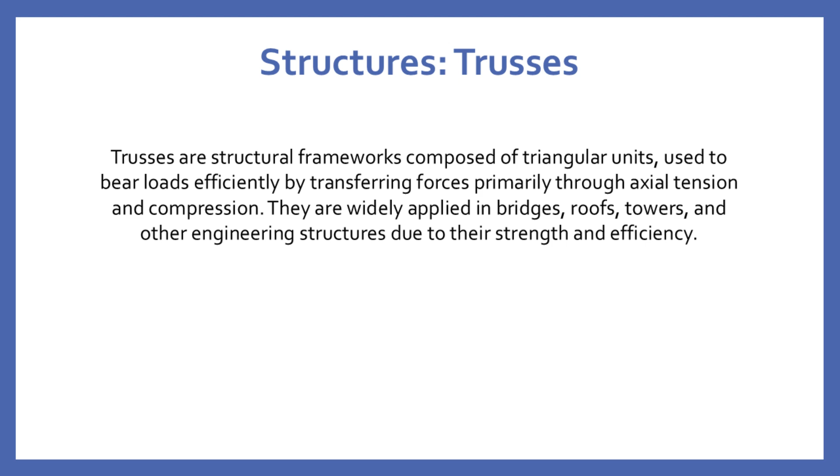Let's talk about trusses, the unsung heroes of structural engineering. A truss is essentially a lightweight yet incredibly strong framework composed of triangular units, like nature's most efficient load-bearing design. These structural marvels are primarily used in bridges, roofs, towers, and countless other engineering structures. What makes trusses special? They transfer forces brilliantly through axial tension and compression. By using triangles, the most stable geometric shape, engineers create structures that can bear enormous loads while remaining surprisingly lightweight. Imagine a bridge that can support heavy trucks or a roof that withstands extreme weather. That's the power of a well-designed truss.

Now let's zoom in on plane trusses, the two-dimensional cousins of our truss family. A plane truss is a flat, interconnected framework made of structural members forming triangles. The magic of these structures lies in their ability to distribute loads effectively and resist deformation. Why triangles, you might ask? Because a triangle is the only geometric shape that cannot be deformed without changing the length of its sides. This inherent rigidity makes triangular trusses incredibly stable under external forces.

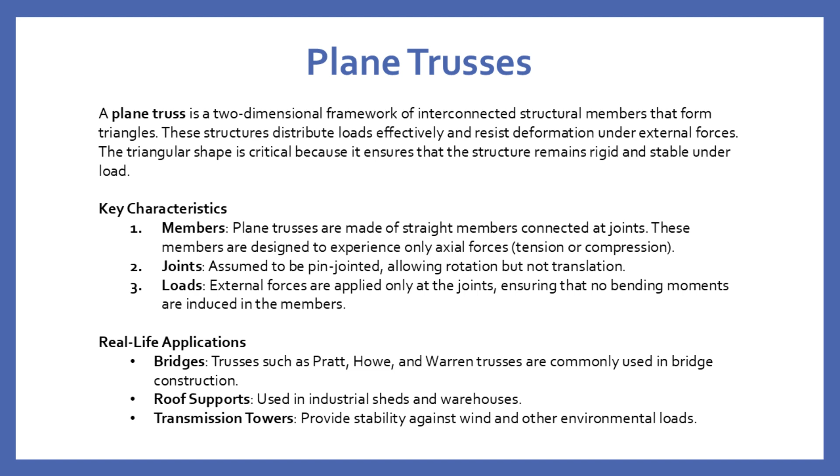In a plane truss, each member is designed to experience only axial forces, either pure tension or pure compression. It's like a perfectly choreographed dance of structural elements working together to maintain stability.

Let's explore the concept of a perfect truss, a mathematical marvel of structural engineering. A perfect truss is precisely balanced, with just the right number of members to ensure stability and rigidity without any redundancy. It's like a perfectly tuned orchestra where every member plays a crucial role. The key to determining a perfect truss lies in a mathematical condition: the number of members must equal 2 times the number of joints, minus 3. Let me break this down for you.

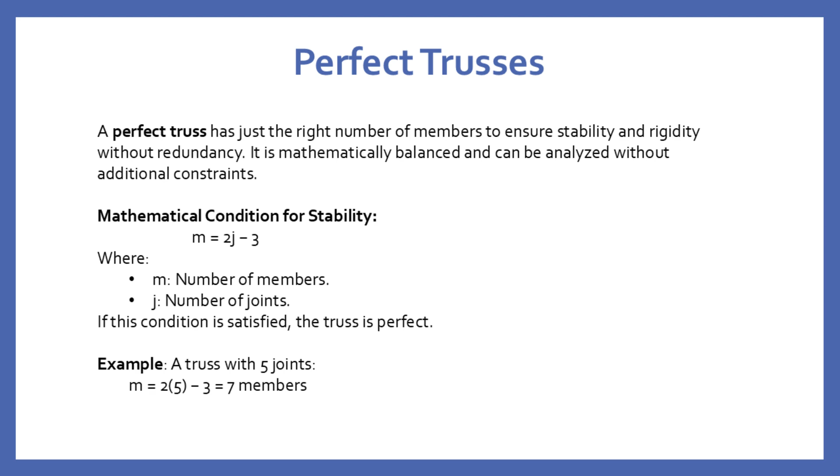Consider a truss with 5 joints. By applying our formula, we'd need exactly 7 members to create a perfect, stable structure. It's a delicate balance between having too few members, which would make the truss unstable, and too many, which would complicate the design unnecessarily.

Now let's discuss imperfect trusses, structures that deviate from the perfect balance. There are 2 types of imperfection we need to understand. First, we have deficient trusses, where the number of members is less than what's mathematically required. These trusses are like a house of cards, unstable and unable to resist external loads effectively. On the other hand, we have redundant trusses, which have more members than necessary. While it might seem like more members would make a structure stronger, in reality, these extra members can complicate the analysis without providing significant structural advantages.

Think of it like adding extra wheels to a bicycle. It doesn't necessarily make the ride smoother or more stable.

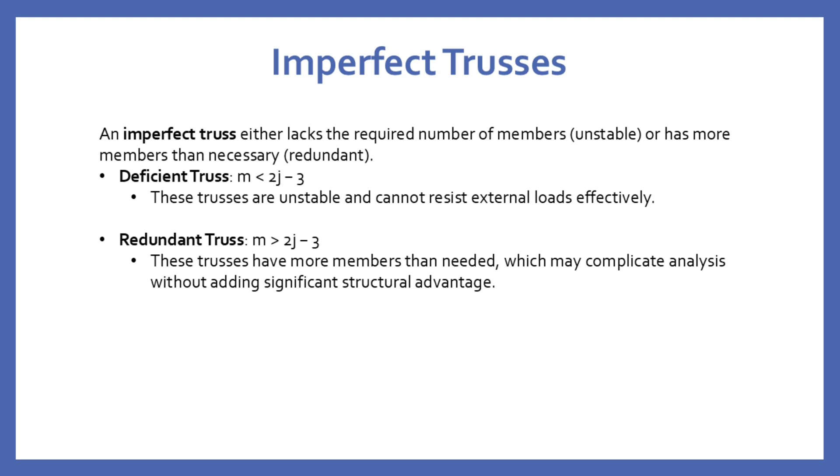When analyzing trusses, engineers rely on several critical assumptions to simplify complex structural behavior. First, all joints are considered pin-connected, allowing rotation but preventing translation, like a flexible joint that can pivot but not slide. Second, all external loads are applied directly at the joints, which helps avoid creating bending moments in the members. Third, members are subjected only to axial forces, pure tension or compression. And finally, the weight of the members themselves is typically negligible or assumed to be applied at the joints.

These assumptions transform a potentially complicated analysis into a more manageable statics problem. It's like creating a simplified model that captures the essence of the structural behavior without getting lost in unnecessary complexities.

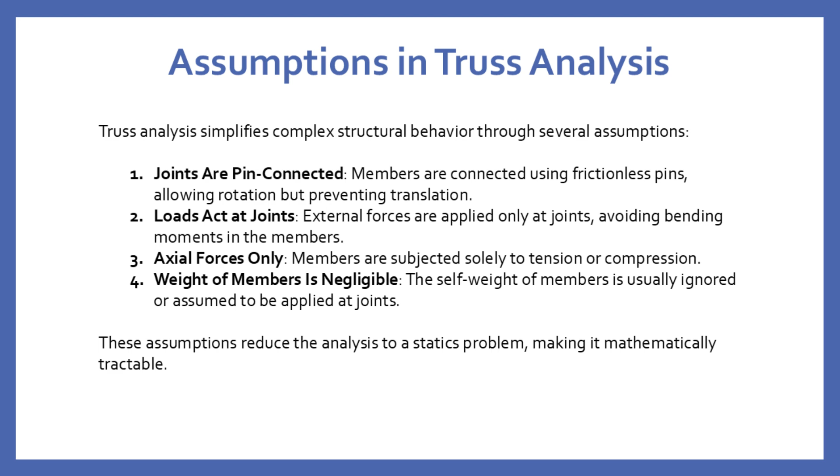Let's dive into the first method of truss analysis, the method of joints. This is a fundamental approach to truss analysis, focusing on the equilibrium of forces at each joint. By selecting joints with only two unknown forces and resolving them horizontally and vertically, we can systematically determine the axial forces in each member. This method is particularly effective for smaller trusses, providing a straightforward and systematic approach to understanding the load distribution within the structure.

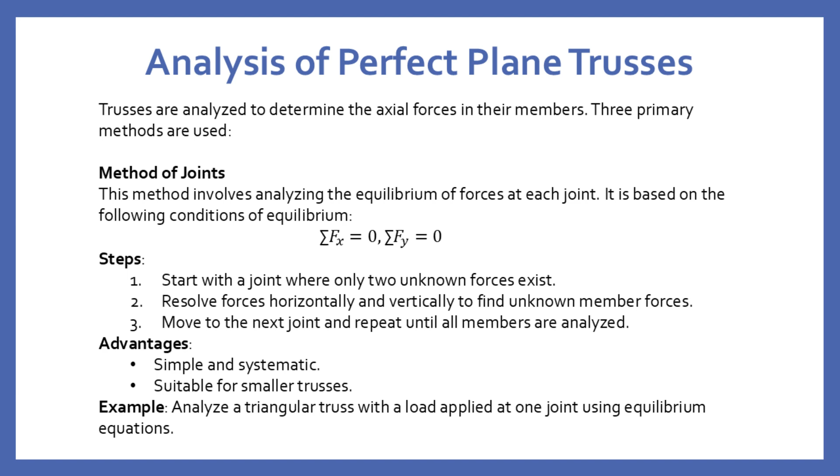The core principle of this method lies in ensuring equilibrium at each joint, where the sum of horizontal and vertical forces must equal zero. By progressing through the truss, joint by joint, we can unravel the intricate interplay of forces and gain insights into the overall structural behavior. This methodical approach transforms a complex system into a series of manageable equations, making it a valuable tool for structural engineers.

Welcome to the method of sections, a powerful analytical technique that takes a different approach to understanding truss behavior. Instead of examining each joint individually, this method involves strategically cutting the truss into sections to analyze specific parts of the structure. Imagine taking a slice through the truss to reveal its internal forces.

The key here is to apply equilibrium conditions to the entire cut section, balancing forces in all three directions: horizontal, vertical, and moment. This method becomes incredibly useful when you want to determine forces in specific members without analyzing the entire truss. It's particularly efficient when you need to focus on critical members in complex structures like bridges or large industrial frameworks.

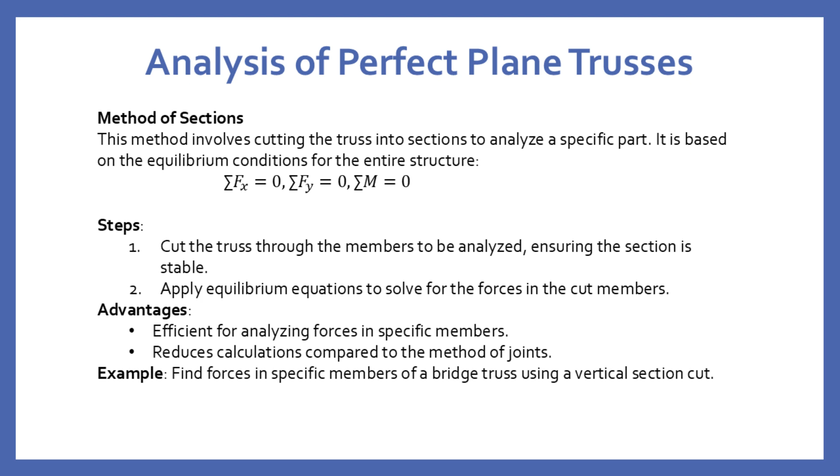Think of it as a surgical approach to structural analysis, precise, targeted, and incredibly informative.

Let's explore the graphical method, a more visual approach to truss analysis. Unlike purely mathematical methods, this technique allows engineers to literally draw out the forces at work.

The process begins by drawing the truss to scale, then graphically representing loads and reactions. By constructing a force polygon, we can determine the forces in each member visually.

It's like creating a picture of forces, where the geometry of the drawing reveals the structural behavior. While this method might be less precise compared to analytical approaches, it offers an invaluable tool for visualization and approximate solutions.

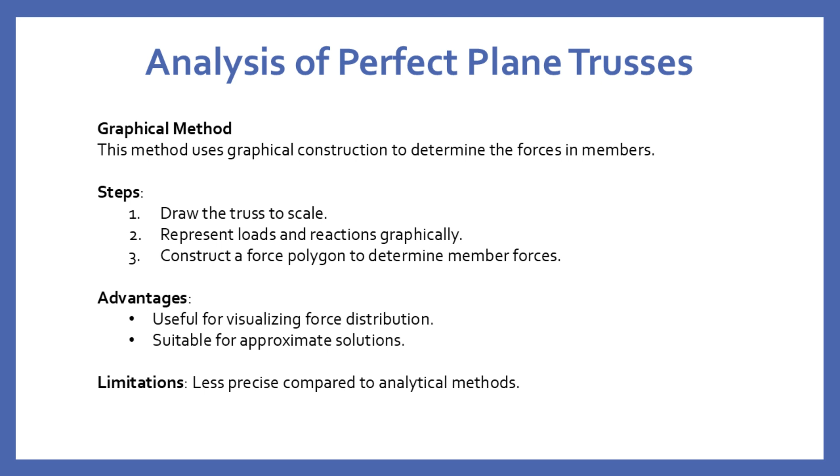Engineers often use this method for quick estimations or to gain intuitive understanding of force distributions. Imagine being able to see the forces flowing through a structure. That's the power of the graphical method.

Truss analysis isn't just a theoretical exercise, it's a critical tool in real-world engineering. In bridge design, engineers use these techniques to determine precise load-bearing capacities and identify which members are experiencing critical tension or compression.

Building structures rely on truss analysis to design robust roof frameworks that can support various loads efficiently.

Transmission towers, those towering structures that carry electricity across vast landscapes, depend on truss analysis to ensure stability against wind

and environmental challenges. Each application demonstrates how understanding truss behavior translates directly into safer, more efficient infrastructure.

From the bridges we drive on to the towers that power our cities, truss analysis is the invisible engineering that keeps our world standing strong.

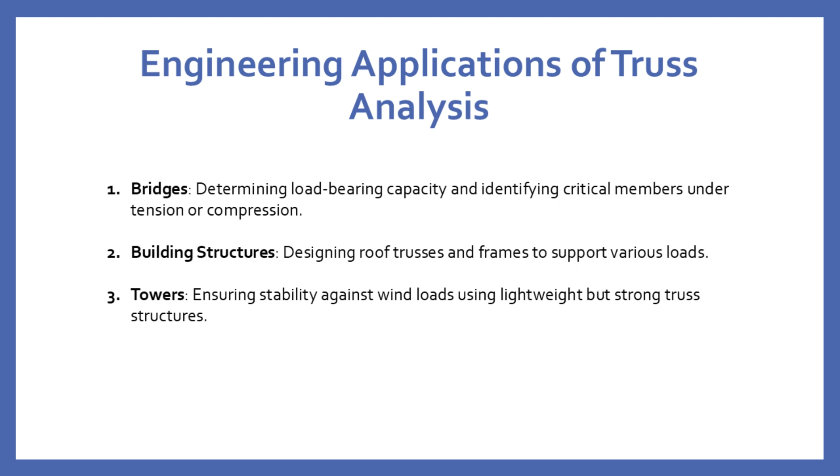Let's dive into the fascinating world of friction, a fundamental force that shapes how objects interact and move. Friction is a resistive force that opposes the relative motion or tendency of motion between two contacting surfaces.

It's not just a theoretical concept, but a critical phenomenon that affects everything from the shoes we walk in to the most complex machinery. At its core, friction arises from the microscopic irregularities on surfaces and the intermolecular forces at points of contact.

Imagine two surfaces trying to slide past each other. The tiny bumps and valleys create resistance. In engineering,

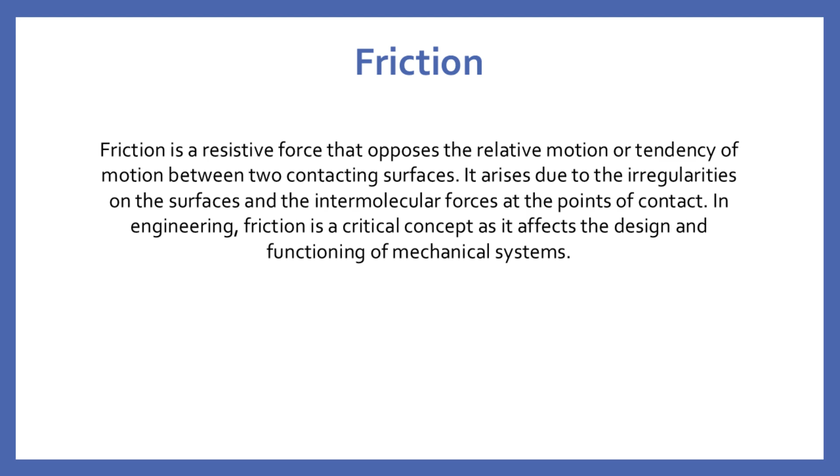Understanding friction is crucial because it determines how machines work, how components interact, and how we design systems to move efficiently or stay stationary when needed.

Let's talk about static friction, the unsung hero that keeps things from sliding around unexpectedly. Static friction is the force that resists the initiation of motion between two bodies when they're at rest.

Picture a book sitting on a slightly tilted table. Static friction is what prevents it from immediately sliding down.

What makes static friction unique is its dynamic nature. It increases as you apply more force, up to a maximum value.

Once the applied force exceeds this threshold, motion begins, and static friction transitions to kinetic friction. It's like a protective barrier that gradually gives way under increasing pressure.

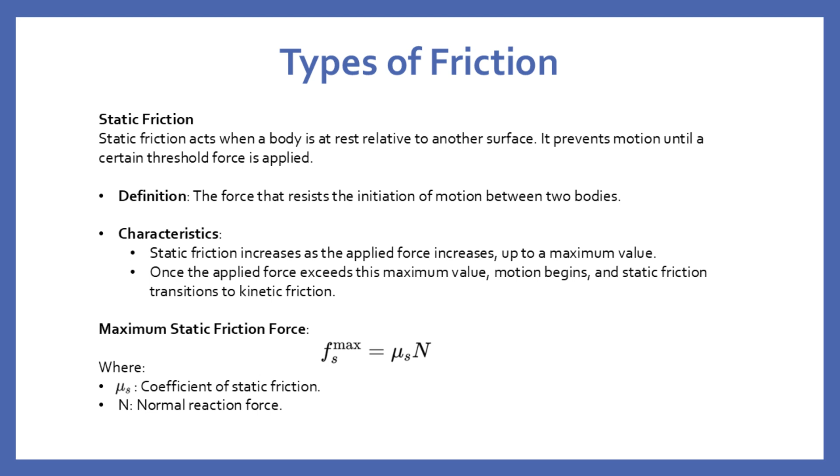This type of friction is crucial in countless applications, from preventing your coffee mug from slipping to ensuring the stability of structures and machines. Now we transition to kinetic friction, the force that comes into play when surfaces are actually

moving relative to each other. Unlike static friction, kinetic friction is a constant force that opposes the relative motion between two bodies. Imagine sliding a book across a table. The resistance you feel is kinetic friction.

Here's a fascinating characteristic. Kinetic friction remains constant for a given pair of surfaces, and interestingly, it doesn't depend on the velocity of motion. It's generally less intense than static friction, which is why it's often easier to keep an object moving once it's already in motion.

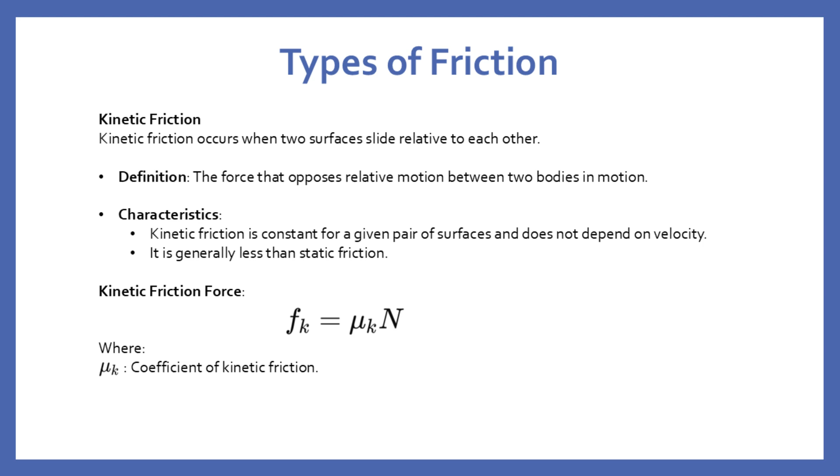This type of friction plays a crucial role in everything from mechanical design to understanding how objects move and interact in the real world. Let's unpack the fundamental laws that govern dry friction.

First, there's the law of proportionality to normal force. The frictional force is directly proportional to the normal reaction force. This means the harder two surfaces are pressed together, the greater the friction between them.

Second, and perhaps surprisingly, friction is independent of contact area. The microscopic contact points determine friction, not the overall surface size.

Third, friction depends entirely on the materials and their surface conditions. Different materials will create different levels of resistance.

Finally, and this is crucial, static friction is usually higher than kinetic friction. This explains why it's often harder to start an object moving than to keep it moving.

These laws might seem simple, but they're the foundation of understanding how objects interact in mechanical systems.

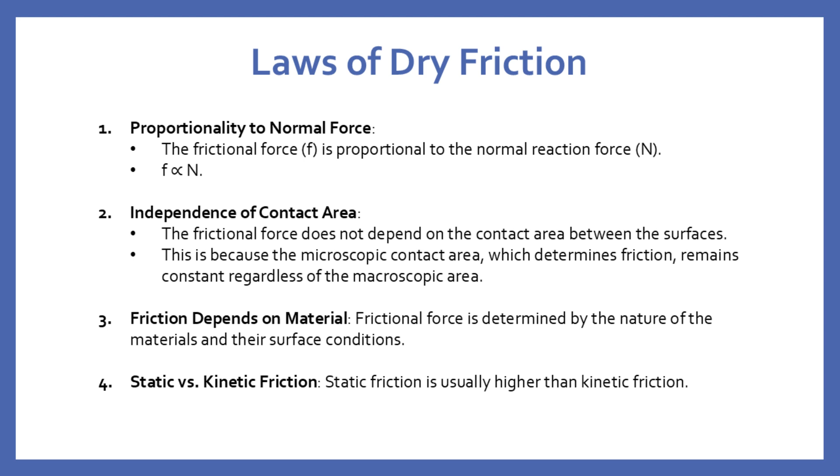Enter the coefficient of friction, a dimensionless quantity that quantifies the interaction between two surfaces. We have two types, static and kinetic coefficients.

The static coefficient applies when an object is at rest, while the kinetic coefficient comes into play when the object is in motion. Let's look at some real-world examples.

Rubber on concrete has a high friction coefficient of about 0.8 when stationary and 0.7 when moving.

In contrast, ice on ice has an incredibly low friction coefficient of around 0.1 when stationary and just 0.03 when moving. This explains why it's so challenging to walk on ice.

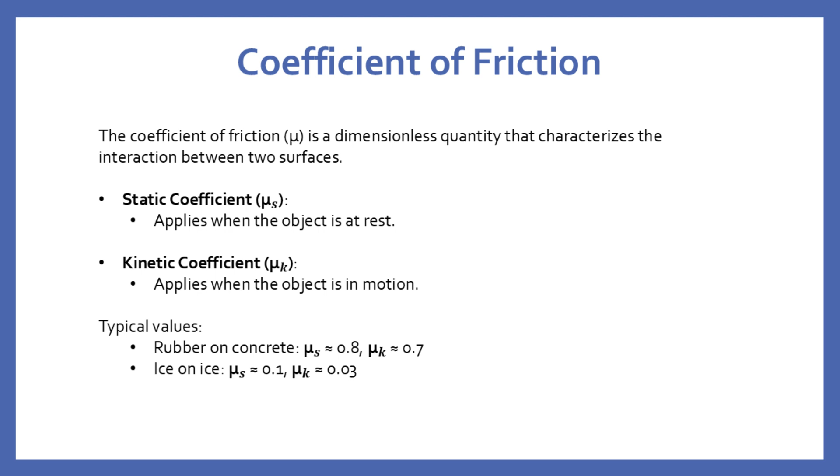The surfaces have minimal friction. Understanding these coefficients is crucial for engineers designing everything from footwear to industrial machinery.

The angle of friction is a fascinating geometric representation of how friction works. It's defined as the angle made by the resultant of the normal reaction and the limiting friction force with the normal force. The formula is beautifully simple: tangent of the angle equals the coefficient of friction. As the coefficient of friction increases, so does the angle of friction. Think of it like a visual indicator of how sticky two surfaces are to each other.

This concept is more than just mathematical. It helps engineers understand how surfaces interact and predict movement under different conditions. It's a key principle in designing systems where friction plays a critical role, from mechanical bearings to understanding how objects might slide on inclined surfaces.

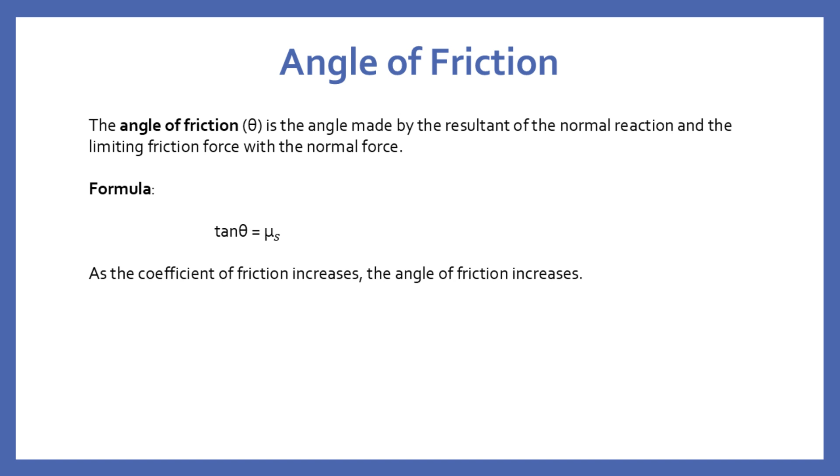Let's explore the angle of repose, a critical concept in understanding how granular materials behave. This is the maximum angle at which a body can rest on an inclined plane without sliding due to gravity. The relationship is direct: the tangent of this angle equals the coefficient of friction. Imagine a pile of sand. There's a specific angle at which it will remain stable before starting to slide.

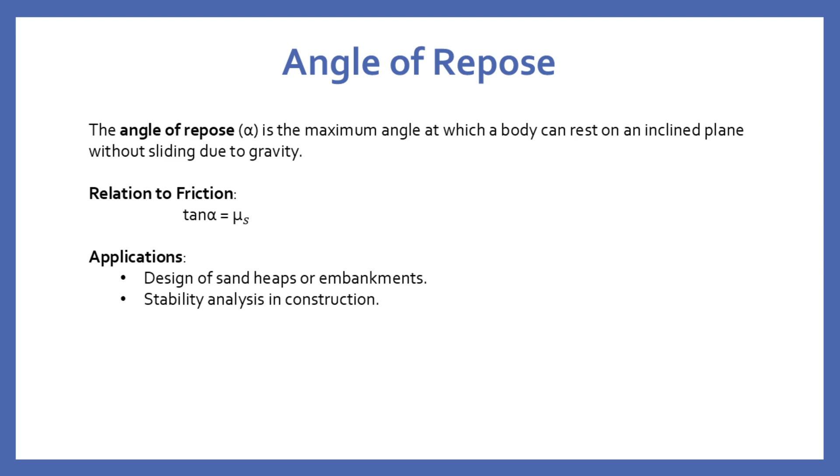This principle has profound practical applications. Engineers use the angle of repose in designing sand heaps, embankments, and understanding the stability of geological formations. It's not just a theoretical concept, but a practical tool used in construction, mining, agriculture, and many other fields where understanding material behavior is crucial.

Let's dive into the fascinating concept of the cone of friction, a geometric representation that helps us understand the limits of force application. Imagine a right circular cone whose axis aligns with the normal force, with a half angle at the apex equal to the angle of friction. This cone is a powerful visual tool that shows the range of directions in which a resultant force can act without causing sliding. Think of it like a safety zone for force application.

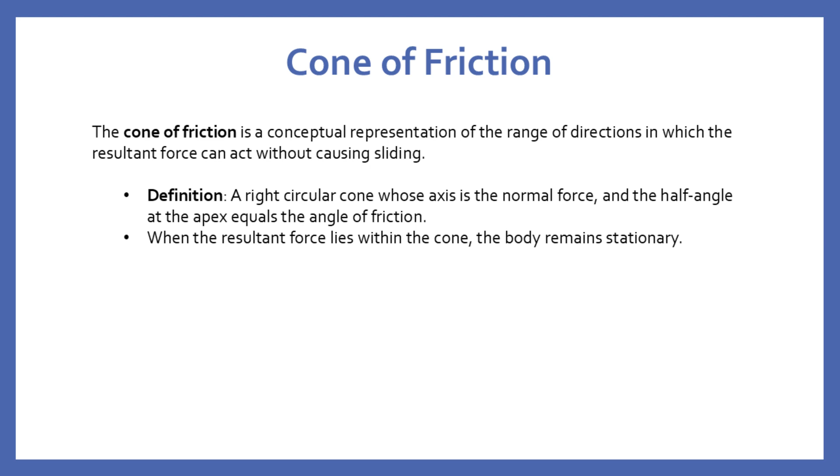When the resultant force remains within this cone, the body stays perfectly stationary. It's a conceptual way of understanding the delicate balance between applied forces and friction. This visualization helps engineers predict and design systems where precise force control is critical, from mechanical joints to stability in complex structures.

Now, let's explore the intriguing phenomenon of frictional locking, a critical concept in mechanical design. Frictional locking occurs when friction prevents the relative motion of components in mechanical systems. Picture this: in bolted joints, press-fitted parts, or complex mechanical assemblies, friction becomes a powerful ally in maintaining stability. It's like a natural fastening mechanism that doesn't require additional hardware.

Applications are everywhere, from ensuring the tight fit of machine parts to preventing undesired motion in precision mechanisms. Engineers deliberately use frictional locking to create robust, self-securing designs. It's a testament to how understanding friction can transform a potential weakness into a strength in mechanical engineering.

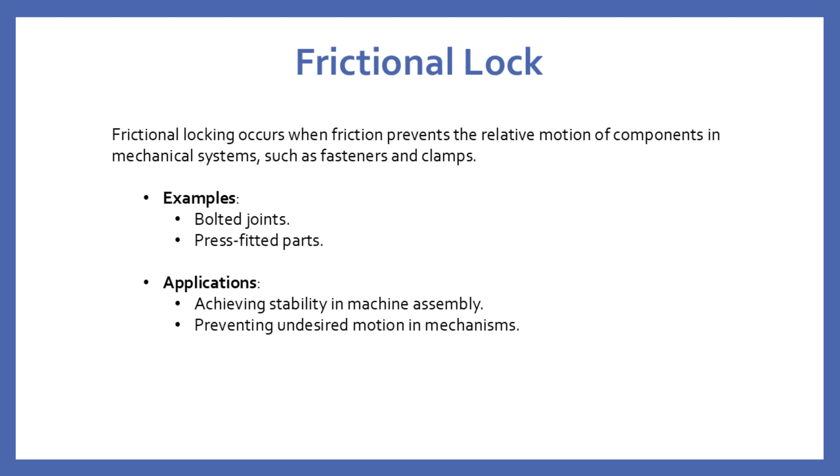Let's examine friction in flat pivot bearings, a classic example of how friction impacts mechanical systems. Imagine a rotating disc in contact with a stationary flat surface. The frictional torque in this system depends on several key factors: the coefficient of friction, the load on the bearing, and the radius of the disc. This relationship reveals how even a seemingly simple mechanical interaction involves complex force dynamics.

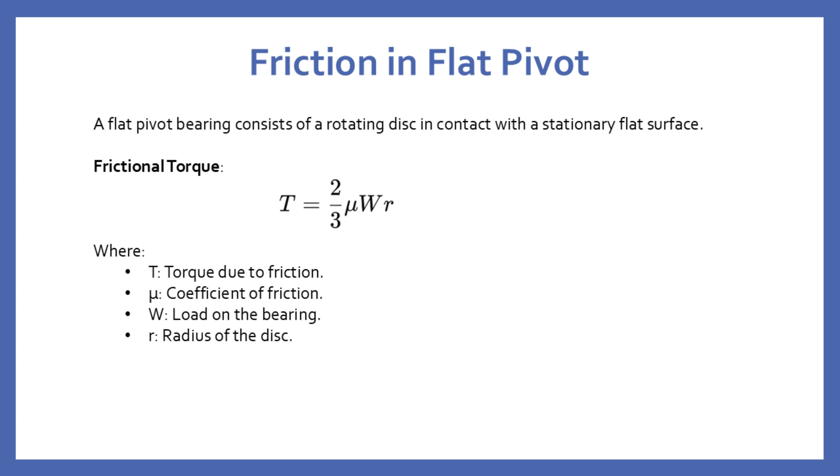The torque generated by friction can significantly impact the efficiency and performance of rotating mechanical systems. Engineers must carefully calculate and account for this friction to design machines that operate smoothly and with minimal energy loss. It's a beautiful example of how microscopic surface interactions can have macroscopic effects on mechanical performance.

Our exploration of friction continues with flat collar bearings, another critical mechanical configuration. In these bearings, a collar rotates against a flat surface, creating a unique friction scenario. The frictional torque here depends on the inner and outer radii of the collar, along with other critical factors. This design is crucial in many mechanical systems where precise rotational control is necessary.

Imagine the delicate balance required to minimize friction while maintaining structural integrity. Engineers must carefully calculate the interplay between the collar's geometry and the frictional forces. It's like a carefully choreographed dance of surfaces, where every tiny detail can impact the overall performance of the mechanical system.

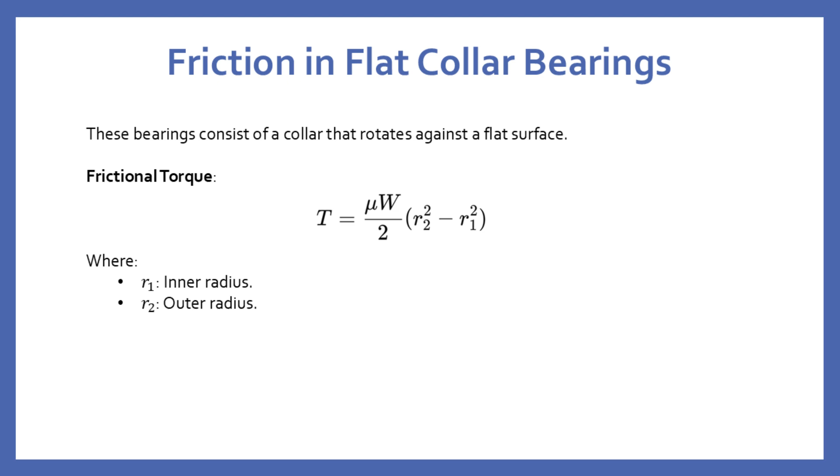It's a perfect example of how engineers harness friction as a useful force rather than just seeing it as a resistance. From power transmission in conveyor belts to drive systems in industrial machines, this principle is crucial. Our exploration of friction demonstrates how understanding these fundamental interactions can unlock incredible engineering possibilities.